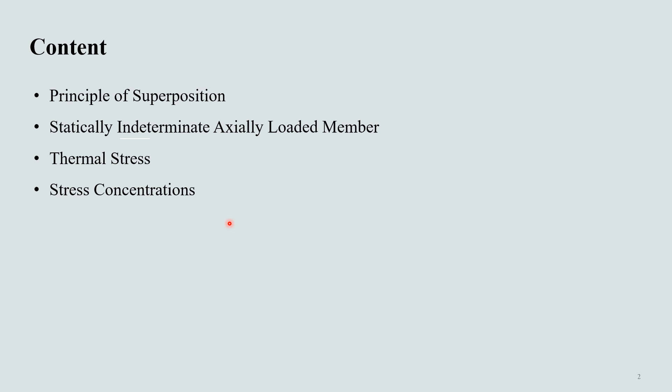The second concept in this lecture is the statically indeterminate axially loaded members. Third concept is the thermal stresses. And finally, we'll end this lecture with a discussion on the stress concentrations.

The principle of superposition is often used to determine the stress or displacement at a point in a member when the member is subjected to a complicated loading. By subdividing the loading into components, the principle of superposition states that the resultant stress or displacement at the point can be determined by algebraically summing the stress or displacement caused by each load component applied separately to the member.

The following two conditions must be satisfied before application of this principle. The loading must be linearly related to the stress or displacement that is to be determined. For example, in the case of axially loaded members, we have the equation for the axially loaded stress and the displacement, which we considered in the previous lecture, and you can refer to that lecture for clarification.

The second condition that must be satisfied is that the loading must not significantly change the original geometry or configuration of the member. If significant changes do occur, the direction and location of the applied forces and their moment arms will change. For example, consider the slender rod in this figure. It is under the application of this load P. If we replace this P by two components, P1 and P2, if P causes the rod to deflect a large amount, the moment of the load about its support, P d, will not be equal to the sum of the moments of its component loads, P1 d1 plus P2 d2.

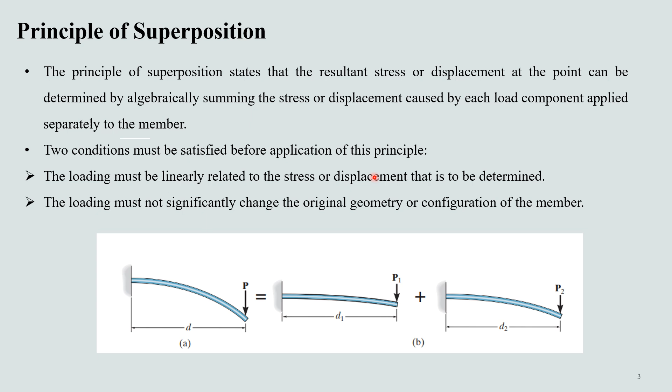Now we are going to discuss the statically indeterminate axially loaded member. In order to understand statically indeterminate axially loaded member, let's consider this bar. If we write an equilibrium equation for this bar by considering the forces that are applied at the supports and this applied load, we'll come to know that this equilibrium equation is not sufficient to determine the two unknowns because we have only one equation and we have two unknowns FA and FB. Thus, we need another equation to determine these unknowns.

How can we determine that equation? That is determined using compatibility or kinematic condition. This means that in order to establish an additional equation for solution, it is necessary to consider how points on the bar displace. In this case, a suitable compatibility condition would require the displacement of one end of the bar with respect to the other end to be equal to 0 since the end supports are fixed. Hence, the compatibility condition will be the displacement of end A with respect to end B is equal to 0.

Now, we can express this equation in terms of the loads by using the load displacement relationship discussed in the previous lecture, which specifically depends on the material behavior. We have this relation delta is equal to PL over AE, and we can notice here that if we consider this segment AC, then the load at this end of AC is FA and the load at the end of CB is FB. And this FA and FB will be in the opposite directions.

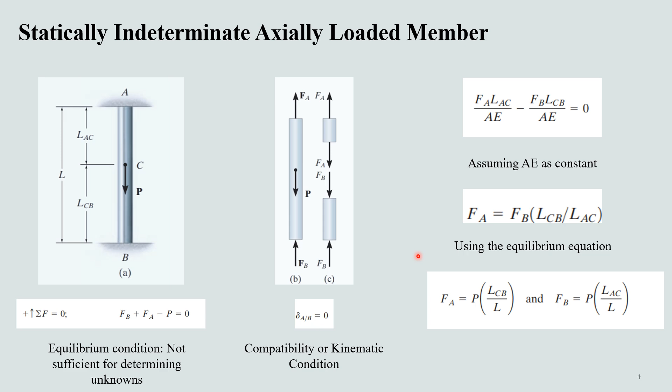Let's summarize the procedure for analysis of statically indeterminate axially loaded members. First of all, the support reactions for statically indeterminate members can be determined by satisfying equilibrium, compatibility, and force-displacement requirements for the member. For equilibrium, we have to draw a free body diagram of the member in order to identify all the forces that act on it.

Then the problem can be classified as statically indeterminate if the number of unknown reactions on the free body diagram is greater than the number of available equations of equilibrium. Then we have to write the equations of equilibrium for the member. After that, if the member is statically indeterminate, we also need to determine the compatibility conditions.

For this we have to draw a displacement diagram in order to investigate the way the member will elongate or contract when subjected to the external loads. Then we have to express the compatibility conditions in terms of the displacements caused by the loading. Then we have to use a load-displacement relation such as delta is equal to PL/AE to relate the unknown displacements to the reactions.

Then we have to solve the equilibrium and compatibility equations for the reactions. If any of the results has a negative numerical value, it indicates that this force acts in the opposite sense of direction to that indicated on the free body diagram.

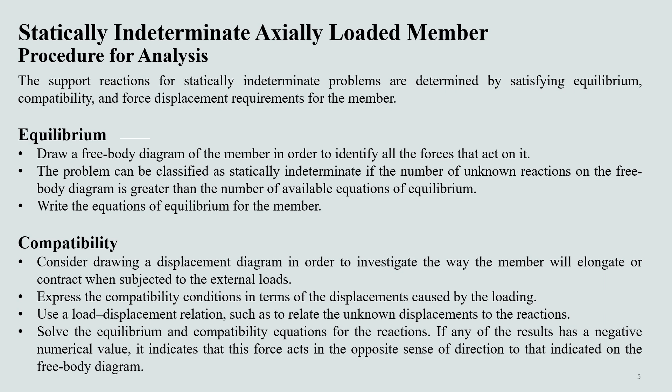This is our first example in which we have a steel rod of diameter 10 millimeters. It is fixed supported on both of its ends, and before it is loaded there is a gap of 0.2 millimeters between the wall at B' and the rod. We have to determine the reactions at A and B' if the rod is subjected to an axial force of 20 kilonewtons. We can neglect the size of the collar at C, and take the modulus of elasticity of steel as 200 gigapascals.

Sorry, this P should be capital. This is a mistake.

Okay, first of all, we have to write the equilibrium equations. We only need to write the summation of forces in the x direction. We usually take the forces directed towards the right as positive. Thus, FA and FB are indicated as negative here, and this load of 20 kilonewtons is positive. We can see here that equilibrium alone cannot provide us with enough equations to get the two unknowns, so we need compatibility in addition to equilibrium.

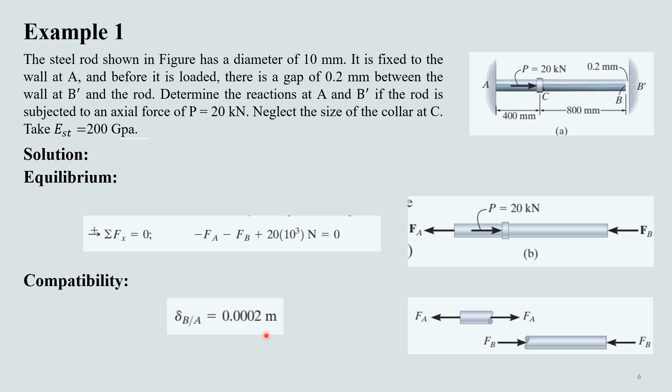For compatibility, we know that the force P causes point B to move to B' with no further displacement. Therefore, the compatibility condition for the rod is simply that the displacement of point B with respect to point A is 0.0002 meters. That displacement can be expressed in terms of the unknown reactions using the load-displacement relationships.

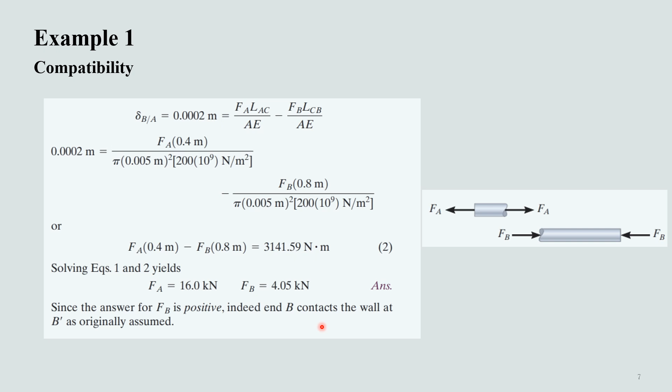Okay, in the second example, we have three A36 steel bars which are pin connected to a rigid member. If the applied load on the member is 15 kilonewtons, we need to determine the force developed in each bar. Bars AB and EF have a cross-sectional area of 15 square millimeters, and bar CD has a cross-sectional area of 30 square millimeters.

Again, first of all, we'll write the equilibrium equations. We have two equilibrium equations in this problem. First, for the summation of forces in the y direction, we have this equation: Fa plus Fc plus Fe minus 15 is equal to 0.

And for the summation of moments, since we are taking anti-clockwise as positive, Fa will cause a clockwise moment with respect to point C, and Fe will cause an anti-clockwise moment with respect to point C. So the moment due to Fa will be negative, the moment due to Fe will be positive, and the moment due to this 15 kilonewtons is also anti-clockwise, so this moment is also taken as positive, and the summation of all these moments is equal to 0.

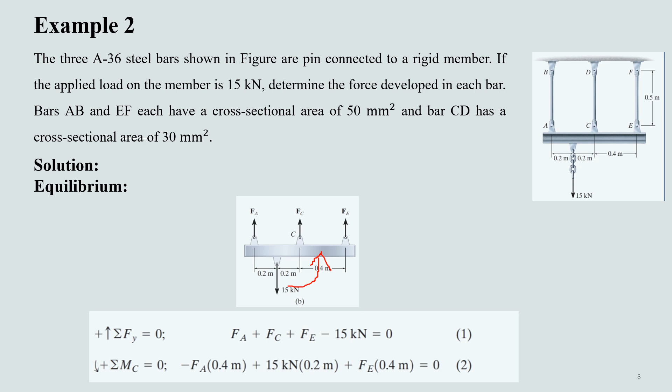How can we determine the compatibility in this case? For this, consider that the applied load will cause the horizontal bar ACE to move to the inclined line A'C'E'. The displacements of points A, C, and E can be related by similar triangles, like this triangle A', this point, E', which is similar to this triangle C', this point, and E'.

Thus the compatibility equation that relates the three displacements is (δA minus δE) divided by 0.8 is equal to (δC, the displacement of point C, minus the displacement of point E) divided by 0.4. We can replace δC, δA, and δE by their respective load displacement relationships, and thus we have obtained the third equation.

And now we have three equations and three unknowns, and we can solve these three equations simultaneously to obtain the three unknown forces in the three bars.

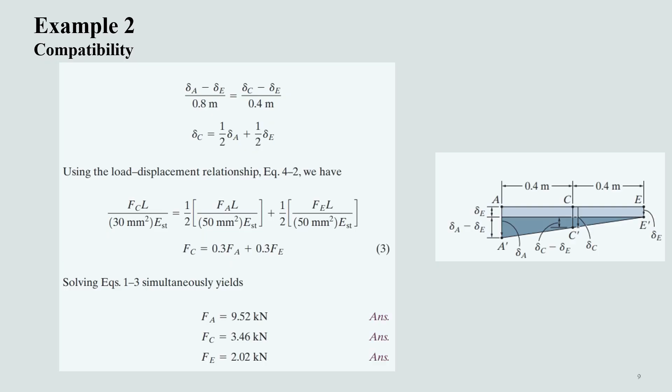We are moving towards another type of axial loading, that is thermal stresses. A change in temperature can cause a body to change in dimensions. Generally, if the temperature increases, the body will expand, whereas if the temperature decreases, it will contract. Ordinarily, this expansion or contraction is linearly related to the temperature increase or decrease that occurs.

If this is the case and the material is homogeneous and isotropic, it has been found from experiments that the displacement of a member having a length L can be calculated using the formula δT = α ΔT L, where δT is the algebraic change in the length of the member. Alpha is a property of the material referred to as the linear coefficient of thermal expansion. The units measure strain per degree of temperature, usually per degree Fahrenheit, per degree Celsius, or per degree Kelvin.

ΔT is the algebraic change in temperature of the member, and L is the original length of the member. The change in length of a statically determinate member can easily be calculated using this equation. However, in statically indeterminate members, these thermal displacements will be constrained by the supports, thereby producing thermal stresses that must be considered in design. Due to the constraint at the location of the supports, these thermal displacements will result in thermal stresses.

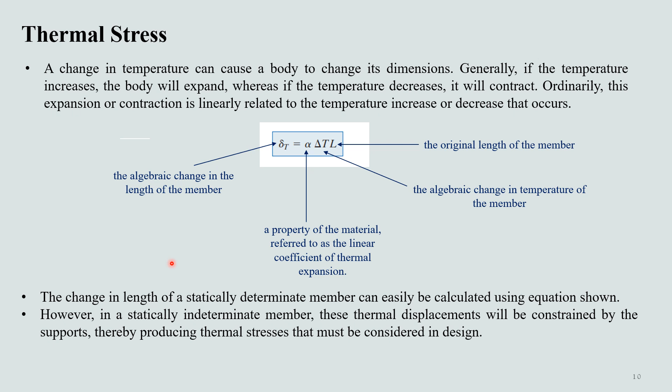Determining these thermal stresses is possible using the methods we have discussed in the previous slides, like establishing compatibility. We'll illustrate the application of these methods in the upcoming examples.

The A36 steel bar shown in the figure is constrained to just fit between two fixed supports when T1 is equal to 60 degrees Fahrenheit. If the temperature is raised to T2 equal to 120 degrees Fahrenheit, we need to determine the average normal thermal stress developed in the bar. Again, we have the basic equation summation of Fy equal to 0. Since there is no external load, the force at A is equal to the force at B, but in the opposite direction. That is, Fa equals Fb equals F.

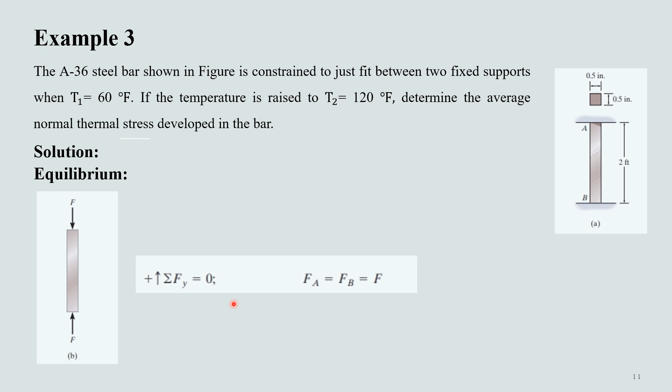From equilibrium, this problem is statically indeterminate because the unknown force cannot be determined solely from the equilibrium condition. Thus, we need to establish the compatibility condition. The displacement at point A with respect to point B will be 0 because the bar is fixed supported. The thermal displacement at A is counteracted by the force F that is required to push the bar back to its original position.

The sum of these two displacements will be equal to 0. The compatibility condition at A then becomes δAB equal to 0, and the summation of these two displacements will also be equal to 0. If we replace the thermal displacement by its equation and the displacement due to the force F by its respective value, we come up with this equation.

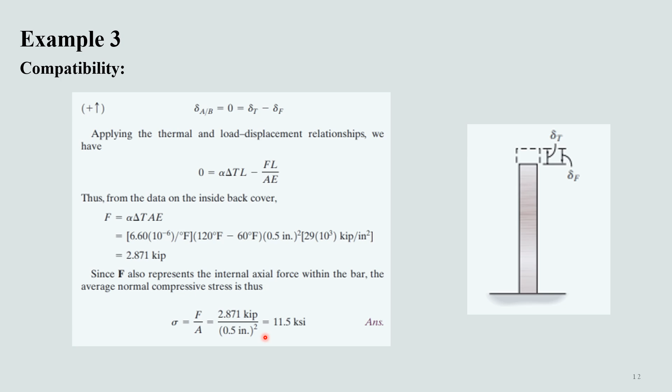Now we can use the data to determine F, because we have all these values. Since F also represents the internal axial force within the bar, the average normal compressive stress is thus this value, and it will be the compressive stress throughout the whole bar.

This is a little bit more complicated example than the previous one because in addition to temperature changes, we are also having an external load here. And now we will see the application of principle of superposition for two different kinds of loading as well. Both these loadings are axial, but the nature of these loadings is different.

The rigid beam shown in the figure is fixed to the top of the three posts made of A36 steel and 2014-T6 aluminium. The posts each have a length of 250 mm when no load is applied to the beam and the temperature is 20 degrees centigrade. Determine the force supported by each post if the bar is subjected to a uniformly distributed load of 150 kilonewton per meter, and the temperature is raised to T2 equal to 80 degrees centigrade.

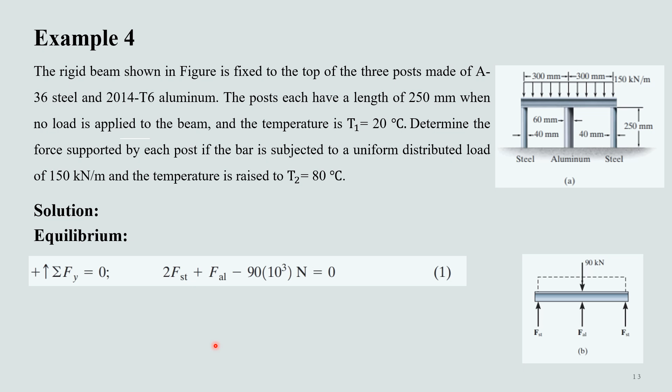Now for equilibrium, we have the summation of forces in the y direction: 2F_st, because we are having two steel rods, plus the force in aluminium must be equal to the force that is being applied at the top. This 150 kilonewton per meter distributed force has been turned into a concentrated force by multiplying it with the length of this rigid beam. Thus we have 90 into 10 raised to power 3. Now we also need one compatibility condition, because we are having again two unknowns and one equation. Let's see how we'll obtain that compatibility condition in the next slide.

Now, due to the load, geometry, and material symmetry, the top of each post is displaced by an equal amount. This means that the displacement in the steel bars will be equal to the displacement in the aluminium. We can see here that delta steel is equal to delta aluminium, and the displacement in the steel as well as in the aluminium will actually be equal to the summation of the displacements due to temperature as well as the displacement due to the loads.

Thus, we have written here equations in terms of the steel and aluminium, and then we can put these equations in this equation two. Now we are having two equations and two unknowns, and again we can use any method for simultaneous equations to determine the force in the steel as well as the aluminium. To be consistent, all numerical data has been expressed in terms of newtons, meters, and degrees Celsius. The negative value for F_st indicates that this force acts opposite to our originally assumed direction of the upward force. In other words, the steel posts are in tension and the aluminium post is in compression.

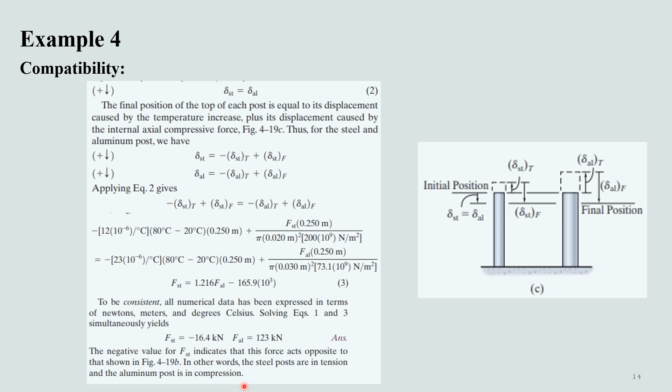Now we have come to the point of discussing a very important topic in stresses, that is known as stress concentrations. It is an important topic because most of the failures in the material occur at the location of the stress concentrations. Now, why do those stress concentrations occur and how can we consider them in design? We'll get to know these things in the coming slides.

It was pointed out in the previous lecture that when an axial force is applied to a member, it creates a complex stress distribution within the localized region of the point of load application. Not only do complex stress distributions arise just under a concentrated loading, they can also arise at sections where the member's cross-sectional area changes. For example, consider this bar, which is subjected to an axial force P. Here, the once horizontal and vertical grid lines deflect into an irregular pattern around the hole centered in the bar. The maximum normal stress in the bar occurs on section AA, which is taken through the bar's smallest cross-sectional area.

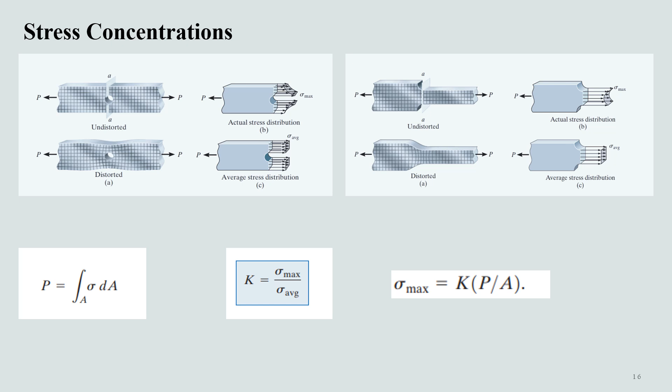Specific values of K are generally reported in handbooks, for example codes, etc. These two graphs show some of the experimentally determined values of K, and we can correlate this K with respect to the geometry and the type of the discontinuity. It should be noted that K does not depend on the bar's material properties, it is only dependent on the bar geometry and the type of discontinuity. As the size R of the discontinuity is decreased, the stress concentration is increased.

For example, if a bar requires a change in cross section, it has been determined that a sharp corner produces a stress concentration factor greater than 3. In other words, the maximum normal stress will be 3 times greater than the average normal stress on the smallest cross section. However, this can be reduced to say 1.5 by introducing a fillet. A further reduction can be made by means of small grooves or holes placed at the transition. In all of these cases, these designs help to reduce the rigidity of the material surrounding the corners, so that both the strain and the stress are more evenly spread throughout the bar.

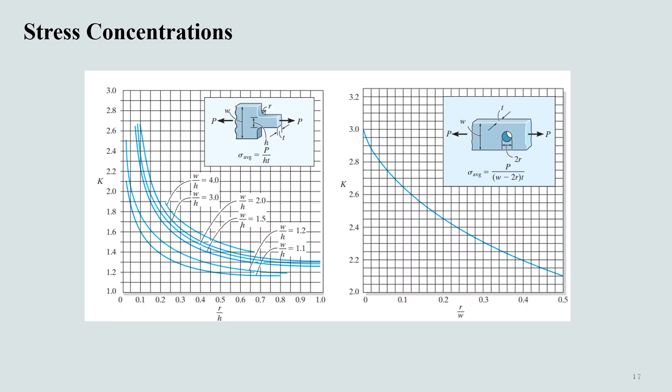The end of our lecture. In summary, we discussed four main topics in this lecture. The first one was superposition. Superposition of load and displacement is possible provided the material remains linear elastic and no significant changes in the geometry of the member occur after loading. The reactions on a statically indeterminate bar can be determined using the equilibrium equations and compatibility conditions that specify the displacement at the supports. A change in temperature can cause a member made of homogeneous isotropic material to change its length. If the member is confined, this change will produce thermal stress in the member.

Holes and sharp transitions at a cross-section will create stress concentration. For the design of a member made of brittle material, one obtains the stress concentration factor K from a graph which has been determined from experiment. This value is then multiplied by the average stress to obtain the maximum stress at the cross-section.

Stress concentrations are also responsible for many failures of structural members or mechanical elements subjected to fatigue loadings. For these cases, a stress concentration will cause the material to crack if the stress exceeds the material's endurance limit, whether or not the material is ductile or brittle. However, the material localized at the tip of the crack remains in a brittle state, and so the crack continues to grow, leading to a progressive fracture. As a result, one must seek ways to limit the amount of damage that can be caused by fatigue.